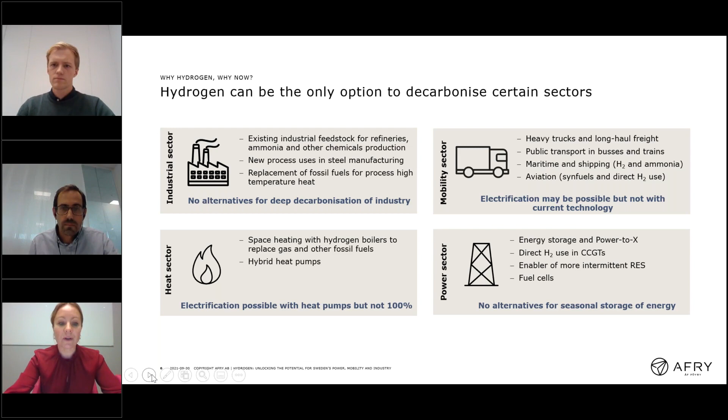So why is hydrogen such a hot topic right now? Well, the main reason why we are talking so much about hydrogen is its role in the decarbonization and the value that it can have in helping us achieve net zero. Hydrogen can actually be the only option to decarbonize certain sectors. Today we will focus on these 4 sectors that you see on this slide.

Hydrogen is currently being used as feedstock in refineries, in ammonia and methanol production. And we have to recognize that the existing hydrogen production results in carbon emissions. It is produced from fossil fuels, mostly gas and coal. And this must be addressed by making hydrogen production low or zero carbon. Because as long as hydrogen is still required as a feedstock, there are no alternatives really other than to decarbonize the hydrogen production.

In industry, hydrogen can also have an important role in new applications, such as being used as a reduction agent in the manufacture of steel. Here it appears that there are also few options to decarbonize steel production other than to use hydrogen. In other industrial uses, however, the role for hydrogen is not so clear-cut. For instance, if hydrogen is to replace gas in the production of process heat, it's possible that electrification could be a better option.

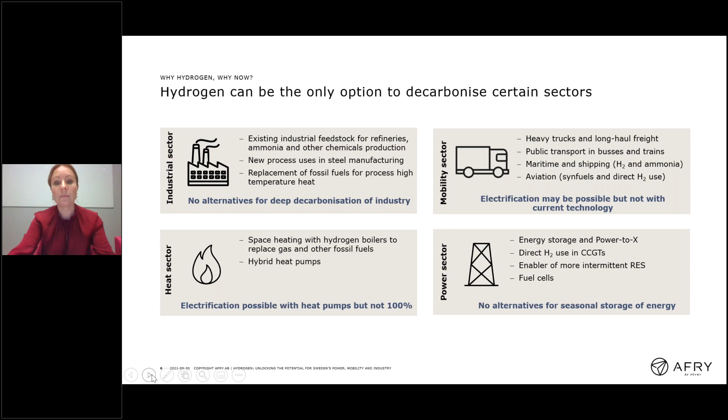Okay, and then we continue.

It has targets for 6 gigawatts of electrolysis capacity, producing 1 million tons of hydrogen already in 2025, and a target of 40 gigawatts, producing 10 million tons of hydrogen in 2030. And we have calculated that meeting these targets will require an additional 11 gigawatts of offshore wind by 2025, in 4 years, and an additional 115 gigawatts by 2030. To put all these numbers in context, that's an additional 900 offshore turbines by 2025.

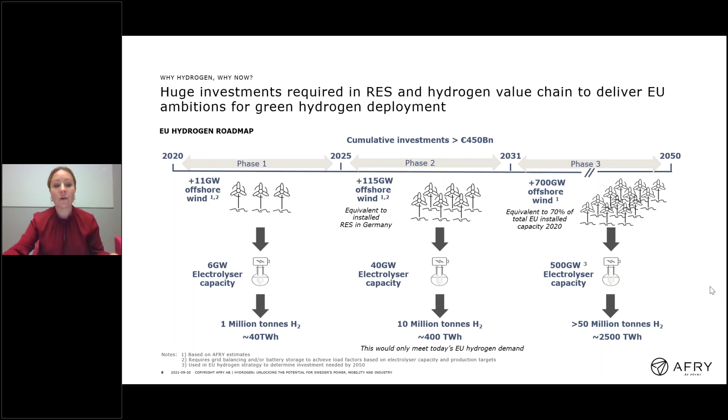So with this introduction, I leave the word over to Pedro. Yeah, thanks, Åsa. And I will talk about the demand potential in Sweden.

Probably many of you know everything or most about hydrogen, but I will start a bit back to basics and ask you, what's hydrogen? I think we all know the chemical formula H2, and it's the most abundant element in the universe, the lightest element known. But hydrogen is mostly associated with different words or concepts or assumptions. The first thought that comes to my mind when thinking of hydrogen, and what I hear from people, is that it's explosive and dangerous.

The opinion is actually starting to change and getting a bit more positive, looking at the future, environmentally friendly. But when you do a bit deeper analysis, you quickly understand it is expensive. Most people know that it's a gas, or mostly used in gas form, and you can use it as a fuel. And unfortunately, a few at least associate it with a Zeppelin, and you have probably heard about the Hindenburg syndrome. I normally say that if it wasn't for the Hindenburg accident, we wouldn't be talking about hydrogen, because it would already be a reality. So I don't know if it's positive or negative, but it's a fact.

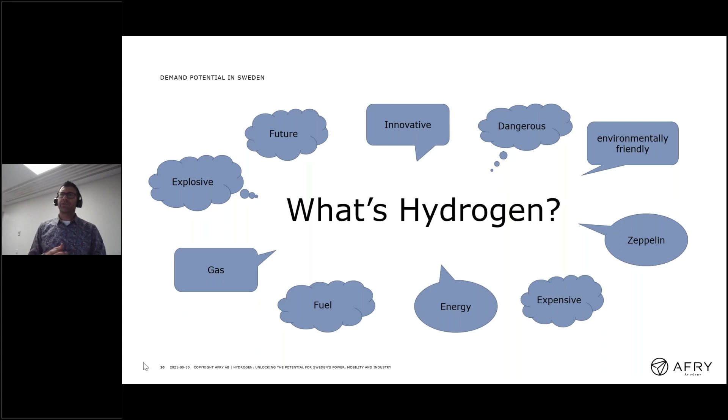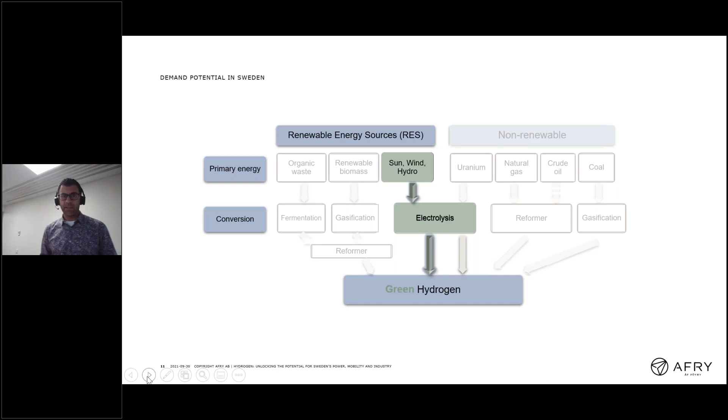And if we look at hydrogen production in the world, on the next slide, we can see that we have production from renewable energy sources and from non-renewable. Of course, if we look at the different processes, the most interesting is electrolysis. Why is this? Electrolysis is actually an emission-free process, especially when you produce electricity from renewables, from sun, wind, or hydropower, and you use the electricity to split water, and then you have hydrogen and oxygen as products, and that's how you actually have green hydrogen. But there are a few other processes, as you see in this table.

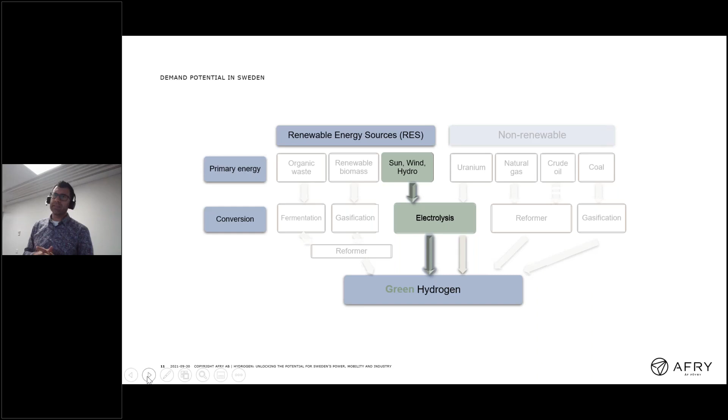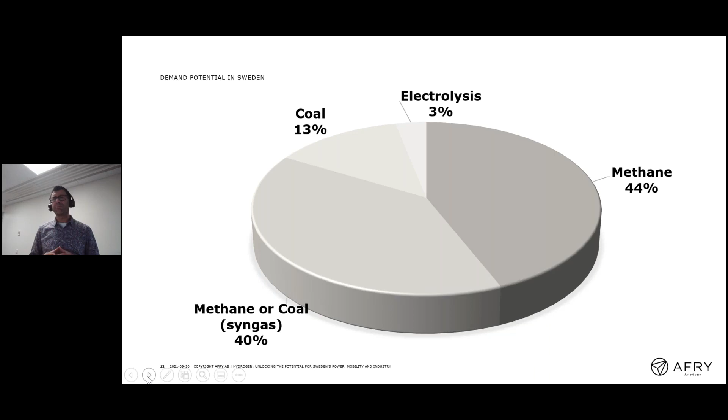This makes me wonder, but why are we talking about hydrogen when most of it is actually producing so much CO2 emissions? Well, because there is actually another option, which was the electrolysis that I mentioned, and it's not new.

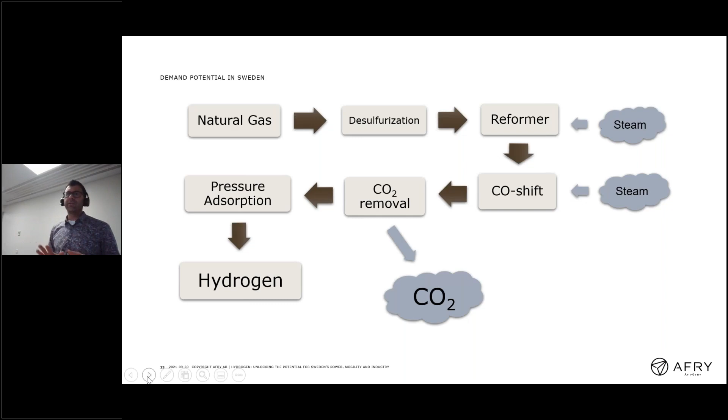If we see it on the next slide, we have been producing green hydrogen since 1927. These are two projects, one of them, at the left, was started in 1927, in Rjukan, Norway, which was a plant for about 300 megawatts. As far as I know, we haven't built yet a larger hydrogen plant like that. There are a few projects of around 200 megawatts, and in that perspective, we have even a little bit larger connected to green steel, but still not operating.

This plant is not operating. It was operating until the end of the 70s. In Glomfjord, Norway, there was also a quite large one, 150 megawatts, that was operating from the early 50s to the early 90s. Both of them were used for fertilizer production through the Haber-Bosch process.

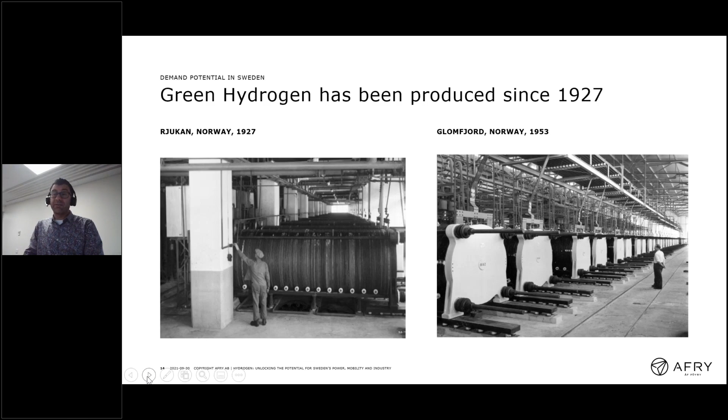Going to fertilizer production, on the next slide we can see that most of the production of hydrogen is actually used in ammonia for fertilizer, which means that all the ammonia production in the world is basically produced with hydrogen that is not fossil free. It comes actually from natural gas, producing quite a lot of CO2, as I mentioned.

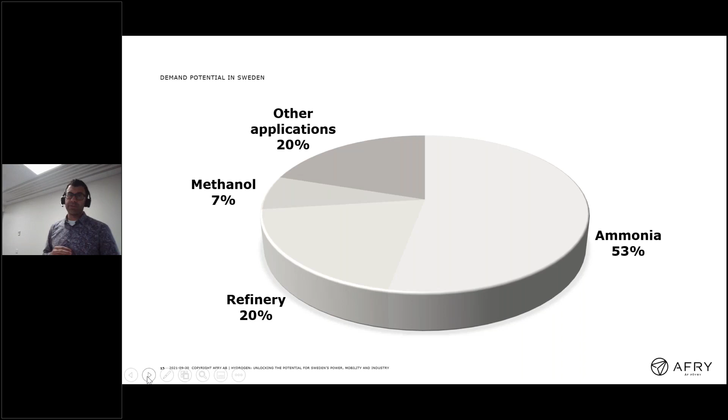If we apply this to Sweden, looking at the next slide, this picture shows just two days ago how the distribution between electricity production in Sweden was: something like 30% nuclear and around 65%, depending and varying, on wind and hydro. I think this shows quite well how Sweden is in a good position for low carbon hydrogen production. I wouldn't say totally green hydrogen production, because we do not have that totally, but we have very low carbon, which is quite kind for the environment.

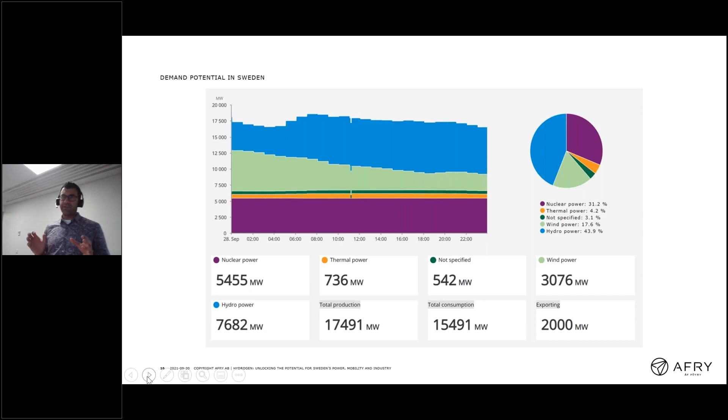Well, why do we need hydrogen basically? The potential of hydrogen is huge, as we can see on the next picture. These are a few of the applications on the right side: everything from green steel, like hydrogen as a reducing agent, ammonia, as we mentioned, methanol, jet fuel, fuel cells, so the transport sector, space rocket fuel even, possibly in the future gas turbines.

Heat is also already a reality and in pilot scale, but already starting. Large scale energy storage, polysilicon wafer, solar cells, fat hydrogenation, you name it. It's quite a lot of potential. But this concept only makes sense if you produce it from renewable energy through electrolysis, producing green hydrogen with oxygen as a byproduct.

So we even have that possibility. Basically, what we show here is actually what we call power to X. The power to X concept means converting electrical power into something else, where you have at the core of the process electrolysis and hydrogen as the core of the power to X technologies. Some people say that power to X technologies will be able to provide almost a third of global energy demand by 2050. So I think power to X is actually a way, or a key, to decarbonization in the future.

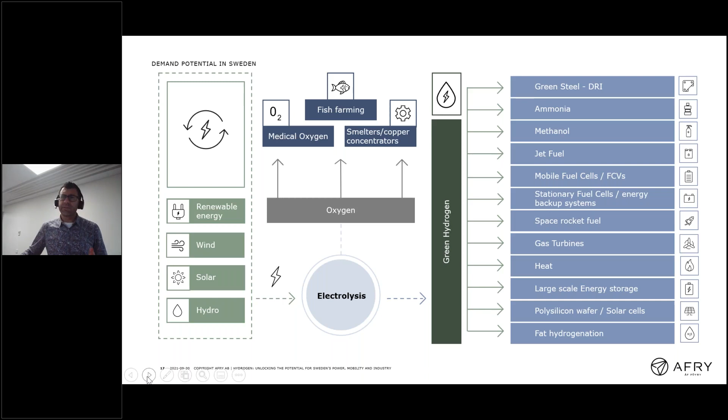Looking at Sweden, what are the potential sectors for Sweden then? You can see it on the next slide very shortly. Green ammonia is possible since we have such an interesting energy production in Sweden, so we have a good infrastructure, and a good possibility for creating a good infrastructure, for producing green ammonia.

Something that is not so much mentioned in Sweden, basically not even almost in Europe, is solar cell manufacture, where you need polysilicon. Large amounts of hydrogen are used to react with trichlorosilane gas to produce silicon and polysilicon for the solar cell wafers. This is actually something that has been done in Norway a couple of years ago, but it has been moved, the production facilities have been moved to other countries, to some low-cost countries. But I see a potential that this could be done in a renewable way, where you can use renewable energy to produce hydrogen.

Transport: hydrogen versus railroad electrification. There are also very interesting concepts in Sweden. You have the typical example of the Inlandsbanan, the inland railroad system of Sweden, which is not electrified. By using hydrogen, you could convert it from fossil fuels for the train system, and at the same time create a logistic system through the inland. So you do two in one: you create a fossil-free railroad instead of electrification, and you use the railroad for transporting hydrogen.

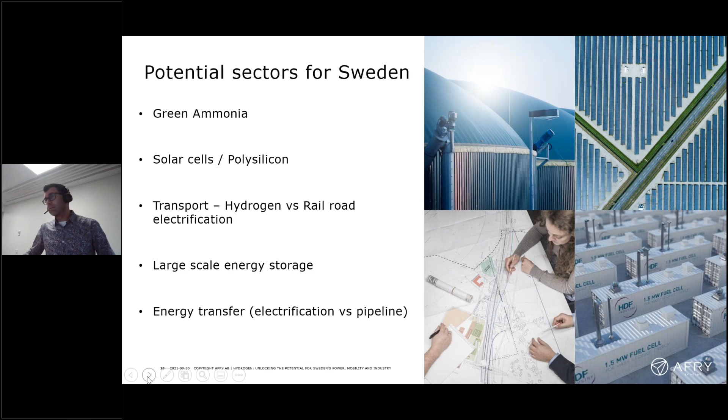But Sweden is already doing some things on this. So if we look not only at the potential, we could look at the initiatives already being taken in Sweden. I think we have a very good perspective for developing this and putting in place all this potential in different areas.

Unfortunately, it's taking time. I've been working with hydrogen since 2008, and back then I was driving a fuel cell car, and I thought, aren't we doing this already? Haven't we done this before? It's been many years, and we still find it very difficult to implement a hydrogen society. But we will get there. I truly believe we'll get there.

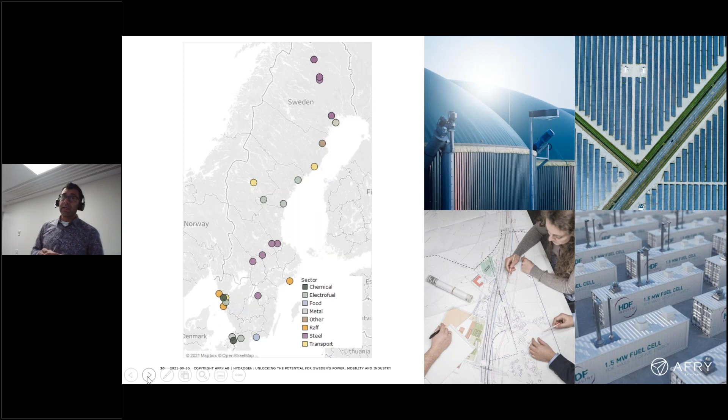I would say a very important issue is actually the competence. There is already a competence demand. At AFRY, we see that. We work on different projects with hydrogen, and we see that many people working in hydrogen are struggling to find competence. So we need competence, for example, on electrolysis, electrochemistry. Handling of hydrogen is also wanted, safety, and of course everything related to hydrogen applications.

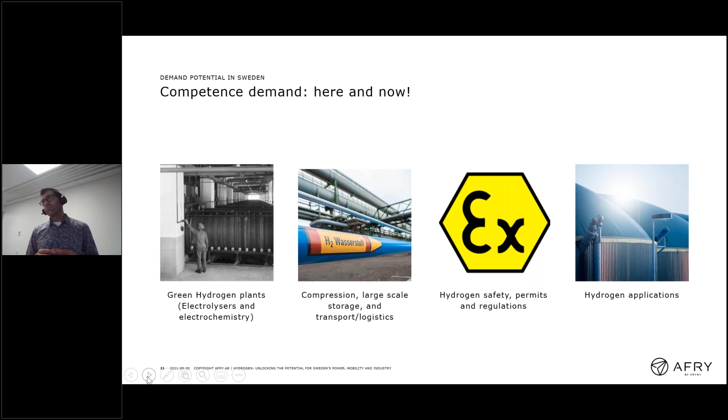And if we look at the long term, I would guess—and this is a guess—that large-scale optimization and grid flexibility is something we will need to look at. We are already engineering large-scale plants from 200 to 800 megawatt hydrogen plants. When we integrate both hydrogen production connected to grid flexibility and electricity production, this will require tools like AI or digitalization methods to optimize the process.

I also see an emerging market for electrolysis when it comes to solid oxide cells. They are much more efficient compared to traditional PEM and alkaline. Large-scale fuel cells are also very interesting; they will show up more and more, and the need will show up. And of course, new end user applications. What we don't know right now is that when we establish a hydrogen society—and I say when, not if—I believe there will be even more applications we can use from hydrogen.

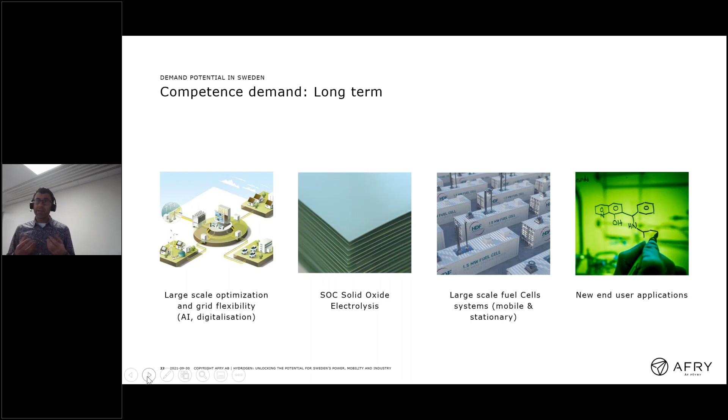Looking at competence, just to finish, I would like to mention a very good initiative in Luleå, in the north of Sweden—for those watching who are not from Sweden. This university, starting under a 10-year period, is making a plan to create specific education on hydrogen, planning to educate and specialize 500 hydrogen engineers. I don't know if that sounds like a lot or too little.

But I think more universities, schools, and research centers should take similar initiatives to educate, train, and increase competence, because this is a challenge we are seeing at the moment, and I think we need to put in effort.

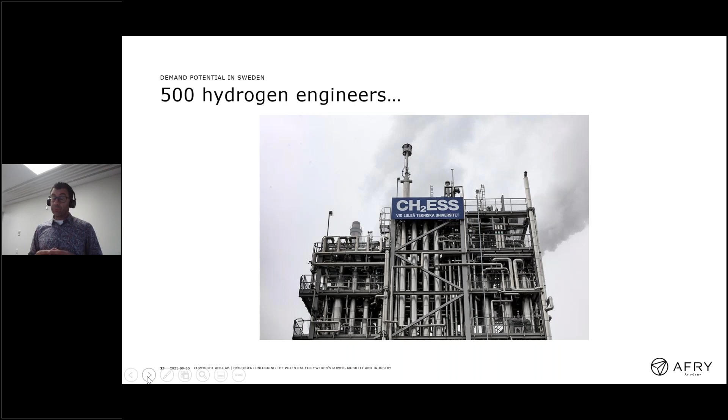So me and Peter Sjölander will present the hydrogen supply and transportation issue. If you can go to the next slide here.

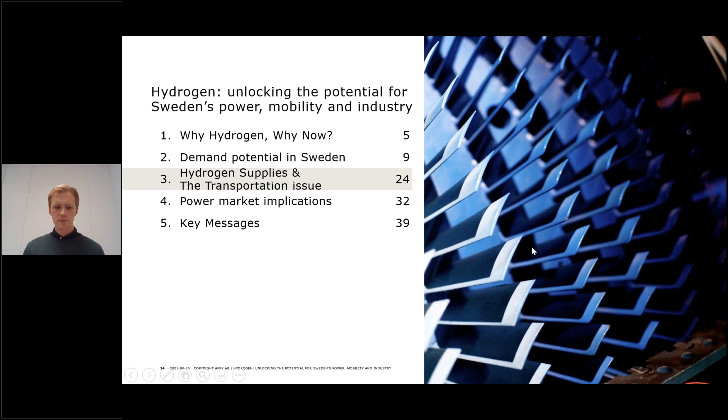Green hydrogen is in many ways very interesting, as it has potential to decarbonize several sectors and replace fossil fuel. But it also makes this sector quite complex, as there are many different parameters to take into account in order to actually find high potential ways to produce green hydrogen. And depending on the hydrogen application, both the future hydrogen demand, as Peter mentioned earlier...

Where it will be, for example, is one parameter. The current and the development on the electricity grid, where the electricity will flow. If or where we will have the future gas infrastructure, and also renewable energy, how much and where the renewable energy will be in Sweden for this example. So these are several parameters which we will discuss during this webinar.

So we can go to the next slide. Generally speaking, you could either produce green hydrogen at the demand side of the hydrogen demand, or you can produce it where you have low carbon, very cheap electricity. And of course, you can also have a mix between these, where you have renewable energy sources and hydrogen supply at the demand place. But we will look at these two examples of producing hydrogen, which are very different from each other and also illustrate our scenarios quite well.

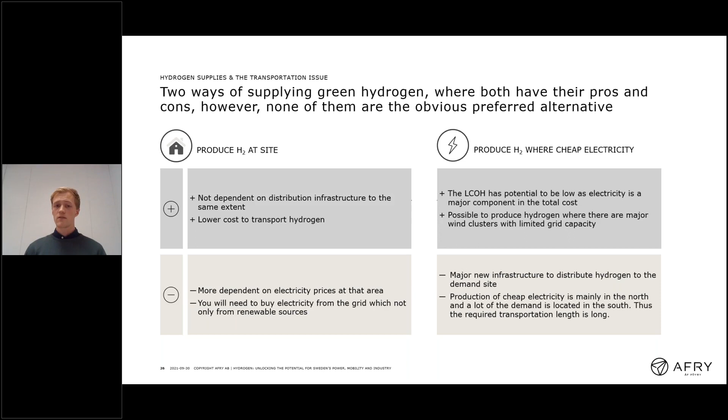If you're looking at the other option, you could produce hydrogen where you have the cheap electricity. On the negative side there, you are more dependent on gas infrastructure to distribute the gas from the site to the demand location. Also, most of the production will probably be in the north of Sweden, and most of the demand, at least now short term, but probably in the future as well, will be in the southern part or on the continent. So you need to export it quite far. On the positive side instead, you will see that we will have a low levelized cost of hydrogen, or the potential, which we'll show in the next slide. Also, it's possible to produce hydrogen for wind clusters, which Peter will discuss a bit later.

So looking at this slide, in order to produce competitive green hydrogen, there are three elements which are extra important to have in mind. The first one is the electricity price. The second one is the distribution of electricity and also distribution of hydrogen. And the third one is the production profile of the electrolyzer, which will be discussed more in the market section at the end.

Starting with the electricity price. In Sweden, we have, as you know, a low carbon mix, about one-tenth of the European average. We also have very competitive prices, especially in price areas SE1 and SE2. Keep that in mind when you're looking at the graph to the right, where we have looked at the levelized cost of producing hydrogen in a Nordic context by 2025. And just to keep in mind as well, this is just the cost of producing hydrogen, not the distribution of hydrogen, which needs to be added on top of this, of course.

Looking to the left, the two left stacks, that's the more common way to produce hydrogen today, as Pedro mentioned: steam methane reforming with and without carbon capture and storage. And to the right instead, we have the way to produce green hydrogen, or hydrogen produced by electrolysis.

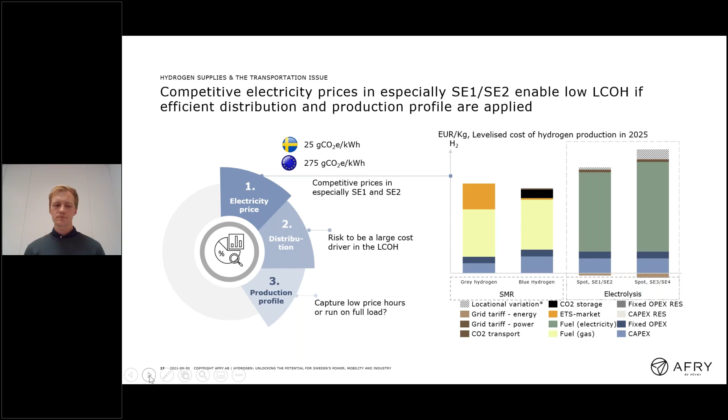As most of you are aware, there has been a lot of discussion in Sweden regarding the bottlenecks in the Swedish grid, both transmission and regional grid. Today Sweden has a very clear north to south energy flow, where more or less most of the electricity is produced in the north, and the demand is mostly in the south.

SVK, in their 10-year plan, is investing a lot in new grid assets, but we have a fast changing energy environment where new production and new demand are coming quickly, so it's hard to be one step ahead. Especially in the future, when we will see a large demand for hydrogen and also electricity from industry, especially in SE1.

What's interesting then is what will happen with the electricity flow. Could it be, for example, that SE2 is pushing electricity both north to SE1 and also south, and that would change the energy flow of the electricity grid and also the constraints.

Production of green hydrogen - that's a risk, because if it's produced on site, and if these sites are in places where you have grid constraints today, that could become even more constrained, because you need more electricity to produce it. But on the other hand, you can also say that hydrogen could be a way - if you produce it one way and then distribute it to the demand side, it's actually another way to transport energy more cost-efficiently, if you're looking at long distance energy carrying.

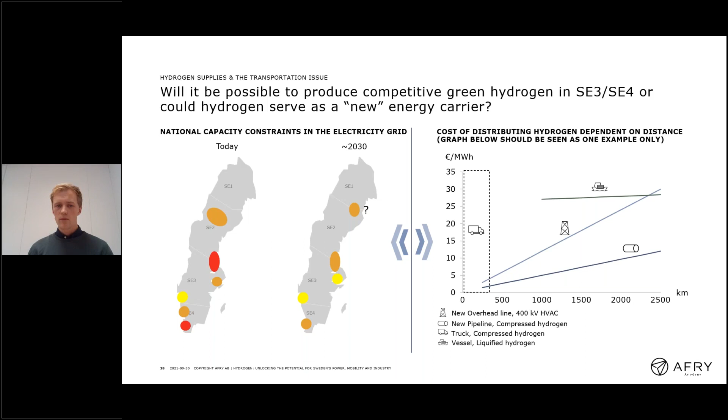And this leads me back to my first slide, so we can look at that again. Because to understand if we should have a gas grid, for example, of where the demand is, or where you want to build your energy supply, you need to take all these types of parameters into account. I've introduced a few here, and Peter will continue to discuss mainly the renewable energy supply parameter.

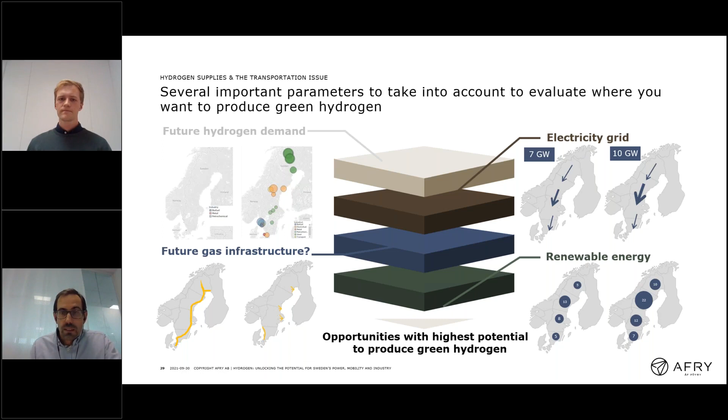Yes, thank you, Simon. So starting out a bit here with the second aspect that Simon mentioned - where do we actually see that we will have a strong supply of renewable energy in Sweden? Well, first of all, renewable energy has been expanding rapidly, in particular in the last 5-6 years, mainly through onshore wind energy. And this level of expansion is maintained also now. Currently in 2021, we have about 2.7 gigawatts installed, under construction, I should say.

In terms of produced energy, at the start of this year we were at the level of producing around 26 terawatt hours of renewable energy from onshore wind power. Towards the end of this year, we will be at approximately 35 terawatt hours. It's moving fast, and this forecast is really reliable, as it is based on binding contracts provided by the turbine manufacturers acting on the Swedish market.

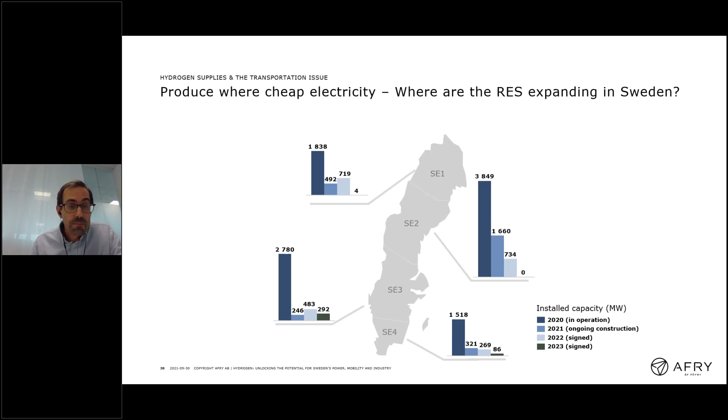With this, we can move to the next slide.

If we now look back at the first aspect Simon mentioned, where we have more of a local production, which we can see more linked to one particular supplying wind farm, for instance. And this situation has been driven by...

the fact that there are potentially very large wind farms in the pipeline, and this is also related to the development of turbine technology. Taking full advantage of given permits means there's a situation where we have what we can call a possibility for excess production in relation to the grid capacity.

The grid capacity can increasingly often be seen as a bottleneck for many projects in terms of how much they would potentially be able to produce.

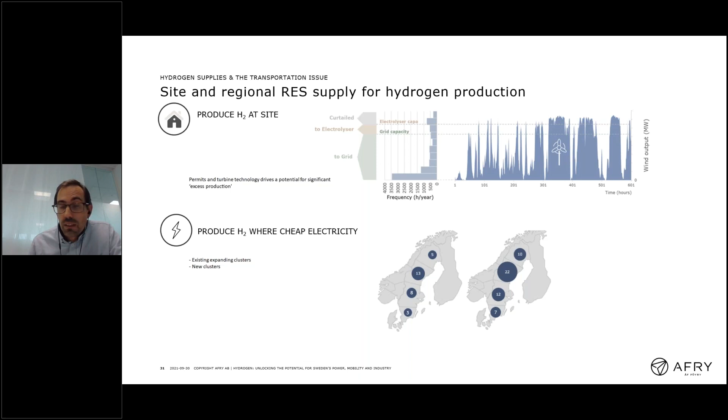Okay, I will talk a little bit about power market implications. But in order to do that, I think I will have to start by asking effectively a question: how should electrolysis plants operate in the market?

Now the operational characteristics of electrolyzers is a bit of an equation you have to optimize. If you have a base load need for hydrogen, or a continuous need, you might need to run it further up the price duration curve, leading to higher variable costs and a higher average cost for your hydrogen production. But if you think about producing hydrogen from just the surplus generation, then your capacity factor needs to be lower, because there are only a certain amount of hours with very low prices and surplus renewable generation.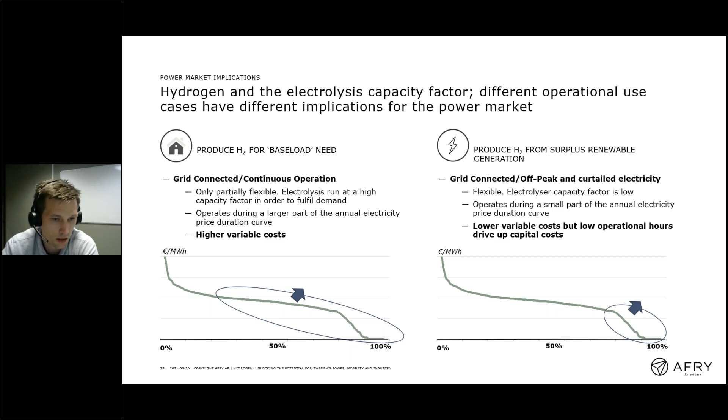So when talking about the deployment of renewables and electrolysis in tandem, I like to say growth begets growth. So a growth in these technologies in the long term can spur what we could call a virtuous cycle of build. So intermittent renewable growth tends to depress power prices. Let's say that you have a power market, you add a lot of renewables into it, it depresses power prices during its hours of production because of its variable production profile. So it tends to lead to more hours of low prices.

And this renewable asset is unable to capture the value of the average annual electricity baseload price in any given power market. And this is what is known as the cannibalization effect. Now, theoretically, if you have an unconstrained renewable resource potential in a power market, renewables should theoretically stop when it's no longer profitable to build, as this cannibalization effect becomes worse, effectively, if costs don't go down.

Now, what flexible electrolysis is able to do is soak up these hours and follow the renewable production profile. So it can counteract this cannibalization effect of renewables. But at the same time, that implies that you have self-cannibalization for the electrolyzer as well. So as you have less cannibalization for your renewables, power prices rise, and you cannibalize the electrolyzer instead. But this is what you could say a virtuous cycle of build.

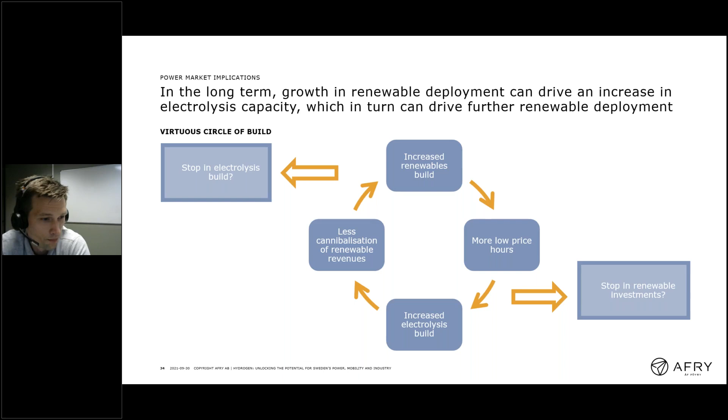So as that increases, then you can increase renewables, power prices go down, electrolyzers are built, less cannibalization of renewables, and this could keep on going for quite a long time, depending on a lot of different aspects. So for example, resource potential: you can get a stop in renewable investments, which in theory should then also stop electrolysis build. And many different technical aspects, and financing, obviously cannot keep this cycle going forever.

So on the next slide, it's a little bit of an example of how merchant electrolysis would effectively be deployed over time. So merchant build of electrolysis is something that would become viable as the technology costs for both renewables and electrolysis fall extensively. So what you see in the picture here is that as fixed costs for your electrolysis plant go down, you could at some point reach what you call cost parity, and then you would be able to run your electrolyzer over a larger part of the price duration curve, pretty much.

So you can run your electrolyzer longer with a higher load factor, but still keep your costs at the same level if capex goes down. So once you reach this cost parity, then you can start to see this sort of reaction to the market, and you can start to see what we say is a merchant build. Now, before this kind of cost reduction can happen, you have to deploy capacity through either subsidies, or you might be able to drive deployment through, for example, PPAs and whatnot.

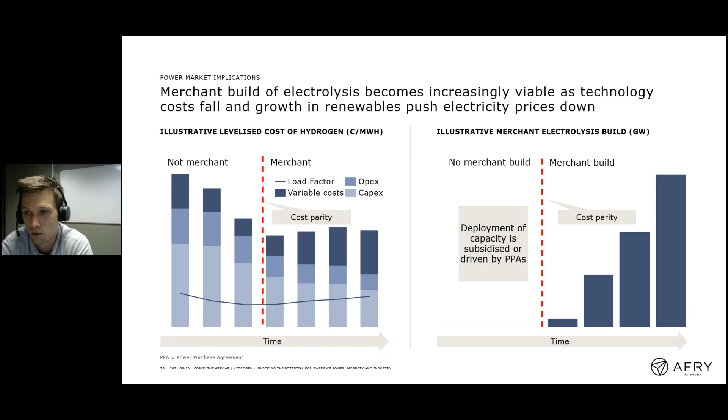So given that background, it's good to try to give an indication of how the Swedish and the Nordic electricity market can be affected by some of these larger mentioned projects in the midterm, especially when we talk about the green steel projects, right? So at AFRY, we do have quite extensive power market modeling capabilities, and one of our core offerings is that we supply independent projections for long-term electricity prices for all European energy markets, the Nordics included, of course.

So just a brief comment on the power market situation in the short term: on the left-hand side, we have the relative price difference between the Nordic price zones, both what happened in 2018 and as a result from a market modeling exercise that we do. And then on the right-hand side, you see the evolution of the energy surplus in Sweden in the same modeling exercise. Now, this energy surplus is effectively mostly due to a deployment of onshore wind power. And as you saw previously on one of Peter's slides, this is mostly happening in the northern price areas.

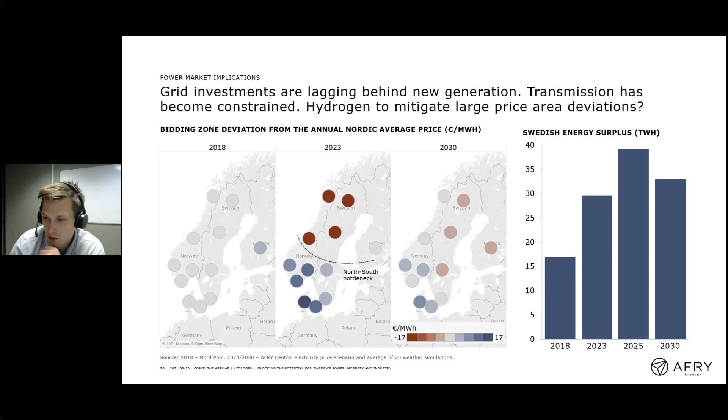So on the final slide, next slide, this shows a little bit the effect of this merchant build cost parity timeline effectively on the average Nordic system price and the variation it might have when we model effectively the Nordic power price by using a lot of different weather variations. So the Nordic power prices are very much dependent on hydrological situation and hydro inflows. So the only correct way to model it is to look at many different weather years and see the differences that it can create in the power prices.

Now, if you start to look at deploying a lot of renewables, then this kind of variation in power price actually increases. But once you start to find this merchant deployment of electrolysis, which can soak up low price hours, this volatility effectively goes in the opposite direction. So you are able to limit the very, very low price hours in the very long term, even though you keep on increasing renewables in the Nordic market. All right, that is the final slide on the power market implication. And I think we get to key messages.

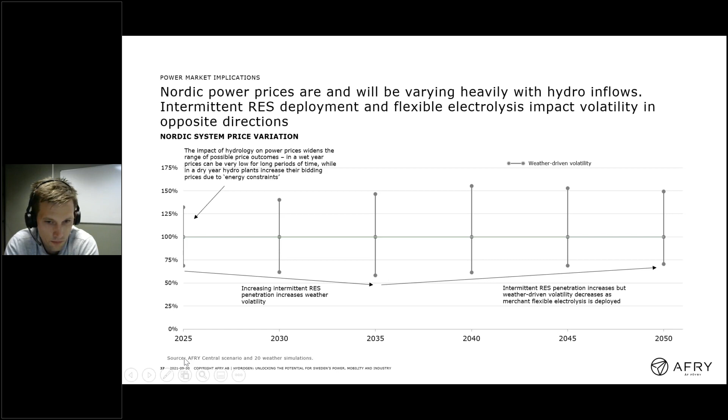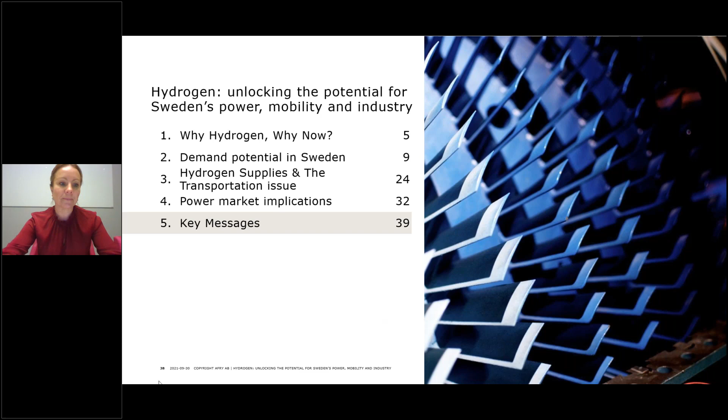Thank you, Marcus. Yes, so we have reached the key messages, and we have 6 of them. So the first one is that the demand for green hydrogen will increase due to its role in decarbonization. And the second one is that Sweden has the right prerequisites for large green hydrogen infrastructure. And also the competence need in hydrogen technologies is a challenge, and that should not be underestimated. And then the fourth one, rather than local site hydrogen production, and based on the forecasted growth of the Swedish onshore RES, it is expected that planned large wind farm clusters will be better equipped to enable an optimized supply for hydrogen production, which is attractive for regional demand.

And the fifth one, electrolysis pairs well in markets with high solar and wind penetration, making a potential case for future merchant builds if technology costs keep falling. And then the last one, as electrolysis deployment increases, it's likely to play an increasingly important role for the electricity price by supporting prices at times of high renewable output.